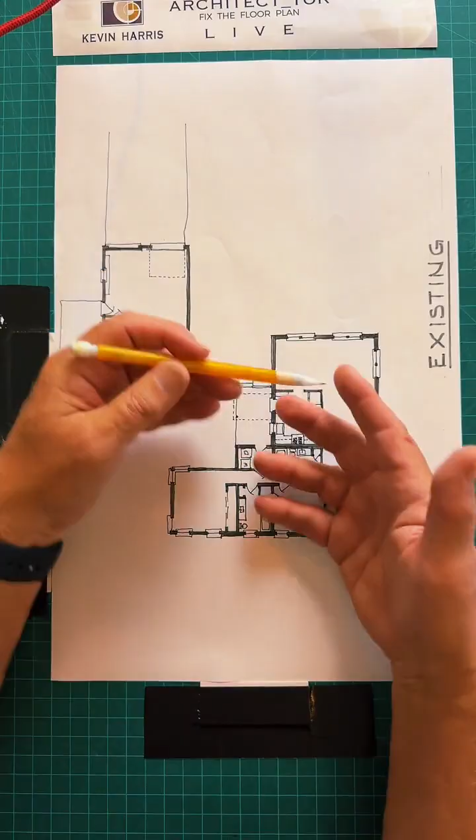Before we get started, in 5 minutes at 6, I'd like to answer any questions anyone has. I look forward to going over the floor plan and sharing with you how I took this existing floor plan, analyzed what's wrong with it, or what I think is wrong with it, and then share how I plan to fix it, and show you the floor plan as it's been fixed.

So does anyone have any questions about custom residential architecture or houses or anything? Just let me know, I'd be happy to answer.

So we've got a realtor that joined, someone who knows a lot about houses. That's wonderful. Andrew, welcome. Maddie, welcome. Kathleen O, welcome. Any questions? I'll be happy to answer them. We've got Debbie joined. Any question? Are you a realtor, Rajan?

How to read the floor map easily. Okay, well this is the floor plan. Architects always like to start with the floor plan, and then we'll go into the 3D. So it's the most common layout for a lanai.

There are all sorts of lanais. It's just a wonderful outdoor space that you're going to have, so there's lots of them. I think a lanai needs to work with the house and with your access from the house to the exterior, which is very important.

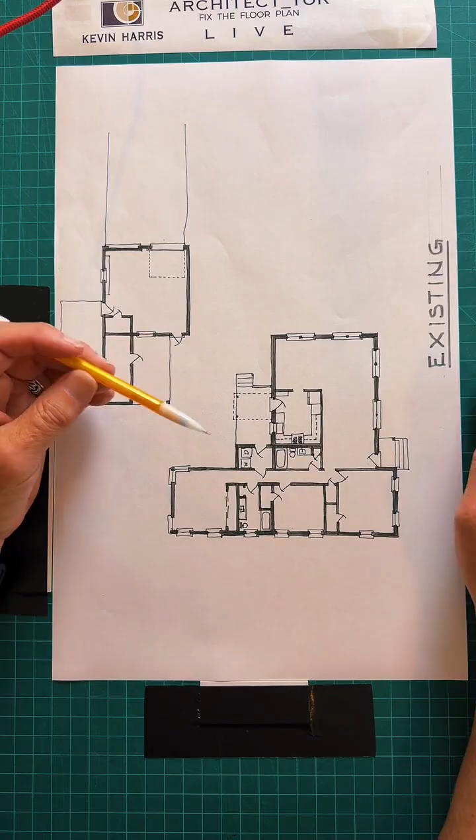No sprinklers in houses typically. Don't you think the closed kitchen is so isolated? Oh, don't get me started, I'm going to be getting into that in 2 minutes. I'm going to start with the kitchen in this house. Very good eyes, Yasin. This kitchen is a disaster. It's isolated, it's also a hallway, and there are many other problems with it. So yes, I do think it's isolated.

Thank you for the compliment from Brownsville, Texas. Wonderful. I was in Dallas and Houston yesterday, and then drove back to Baton Rouge so I could do this tonight.

All right, sprinkler systems. You're a pipe fitter, and some houses in New York have sprinkler systems. This is true, and on the really larger houses we do, I think a sprinkler system is excellent. It's typically not required, at least in Louisiana. I'm not aware that it is. But sprinkler systems are not a bad thing to have, especially if there's a fire, you need to get it at the source.

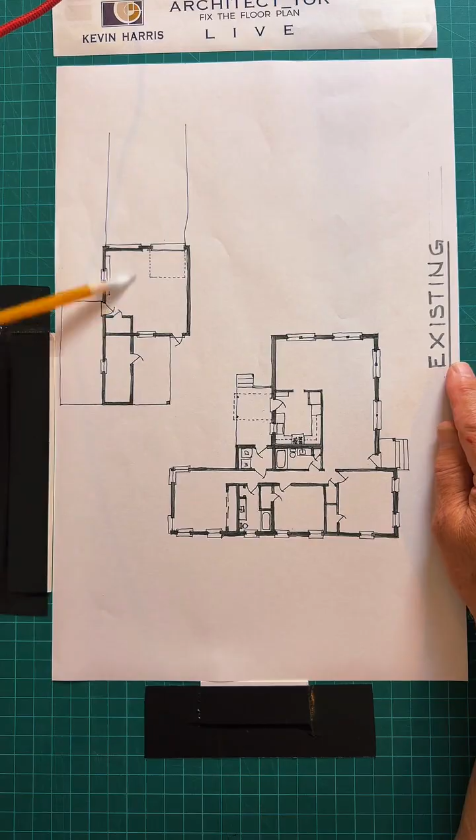Approximately 1,700 square feet. There's a garage here with a storage room added to it, and then a little concrete outdoor deck. There's a raised deck in the back with a small covered area or trellis work over it. So what's the problem with this floor plan?

Well, the first thing, which has already been pointed out, was the kitchen. So here is the kitchen, right here. What's the problem with the kitchen? One, the kitchen is isolated from everything else. It's in its own room.

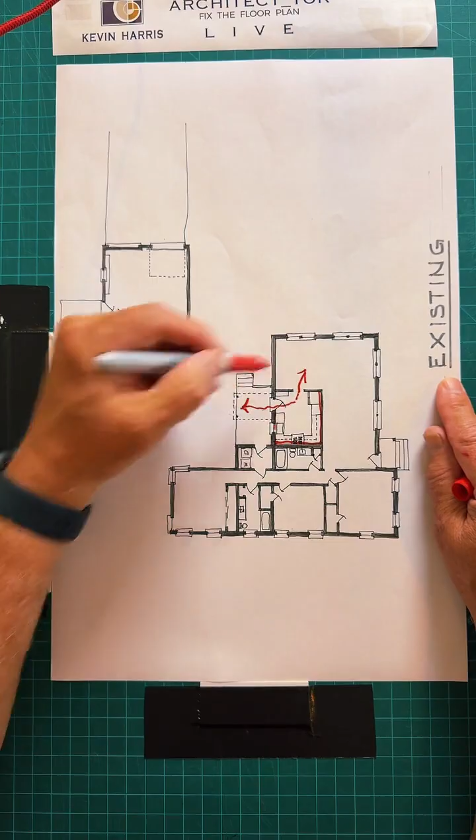Worse than that, the kitchen is made into a hallway because that's the only way to get outside from this whole living area. And the work triangle is pretty good, here's your work triangle. However, if you have any guests helping you or visiting with you in the kitchen, they can't help out because they're going to be in the way of this triangle. So there's a lot of problems with the kitchen.

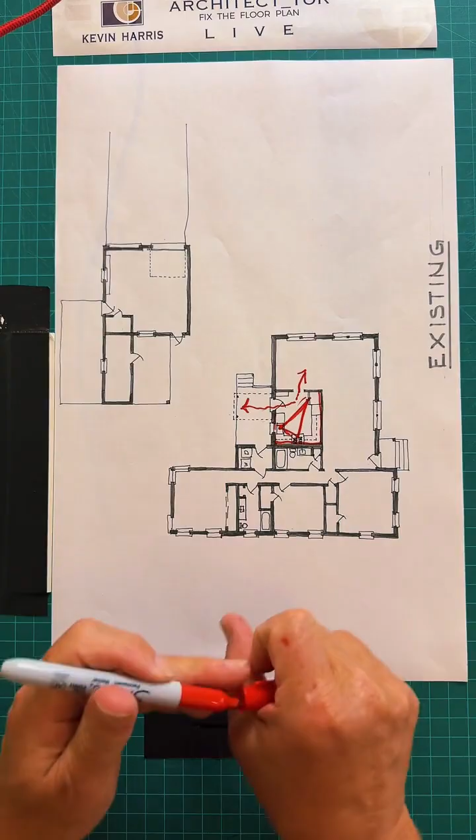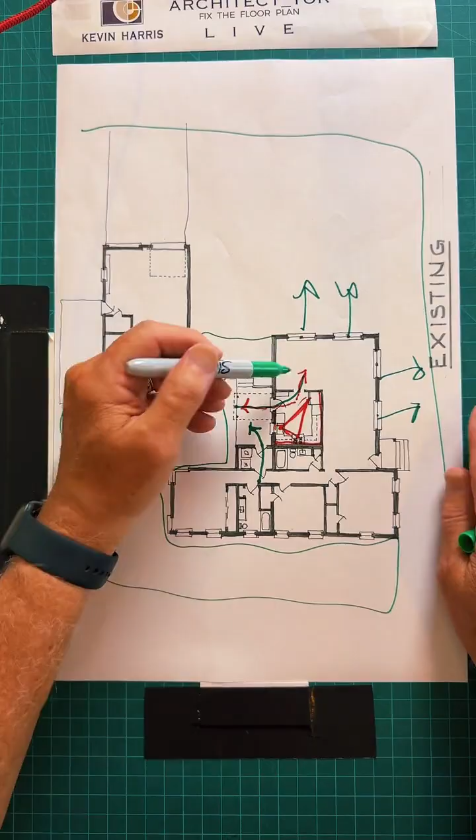The next item, yard access. Here's the yard, all over here, right? And the only way to get to that yard is through the kitchen, or worse, through the laundry room to the deck here. So the house and the living spaces all face the street. The house is on a corner, by the way. And so these windows face the street, but you can't get to the yard from this main living space, the den, living room, and dining room. So that's a problem, yard access.

The third item, the utility room, which I mentioned a little while ago, it's dysfunctional. It's wide enough for a washer and dryer, but there's 2 doors into that room. So you open the door here, and then you can stand in the utility room and just work washer and dryer, and that's it. The only folding space you have is on top of the washer and dryer. And then there's another door here that goes into the hallway right here, which is to the bedrooms. So the utility room needs serious help. It's just in the bad space.

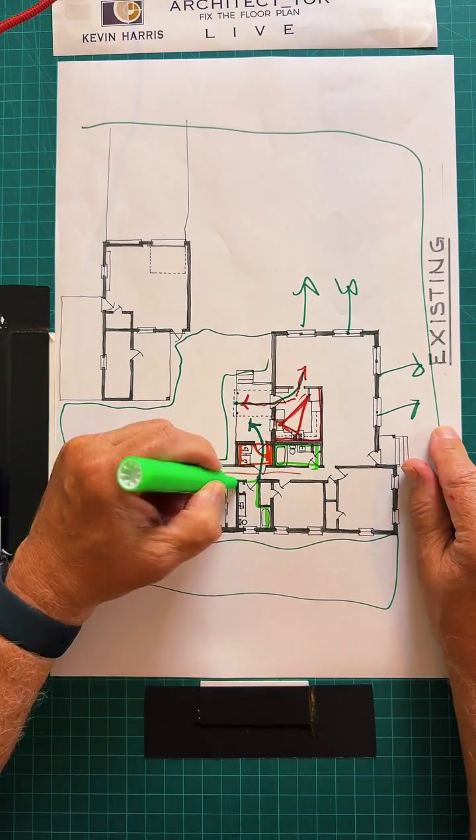The primary suite. The owners would like to have a walk-in closet and their own bathroom. Right now, the house has 2 bathrooms. However, they're both set up as guest bathrooms. Here's one, and then here's the other one. Neither one is private to the owner's suite. And so you've got bedroom 1, 2, and 3. And here's the closet for the owners. This needs to be enlarged. So the pain points here are the kitchen, the utility room, and the lack of a primary suite.

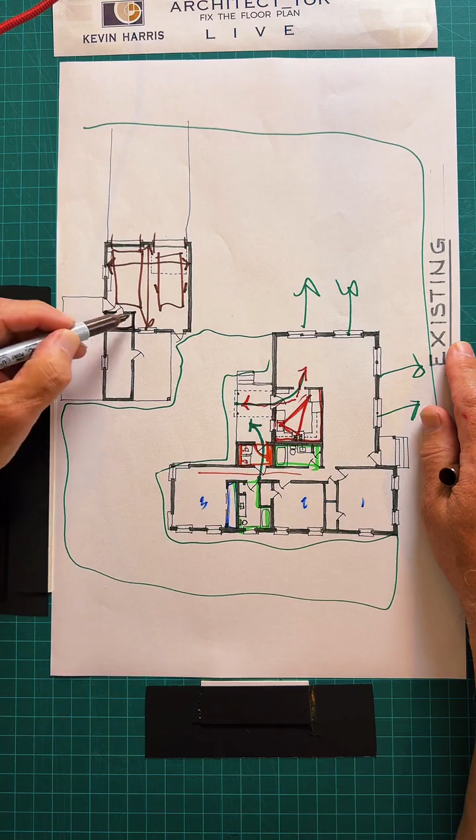The third thing wrong with this house, the garage. These garage doors are only 8 feet wide, which means the garage is just under 20 feet by 20 feet. A parking space without anything to worry about is usually 10 feet by 20 feet. But when you come in with your car, you can't open the door because there's another car next to it, if you could get 2 cars in there neatly. Another thing is the previous owners of this house took part of the garage and added this storage room inside the garage, which makes this big enough for a golf cart, but not for a car. And they wanted to have parking for 2 cars. So that's a problem.

The last issue I want to talk about is outdoor living. This is the outdoor living area. It's a raised house, so you either go through the laundry room or the kitchen, and you can get to this outdoor deck, which is only partially covered right here by a trellis. And then you look down 3 feet, and you've got your yard. So the house and the living and the outdoor covered areas, they don't connect to each other. They're all dysfunctional. They're separated, and they're all isolated.

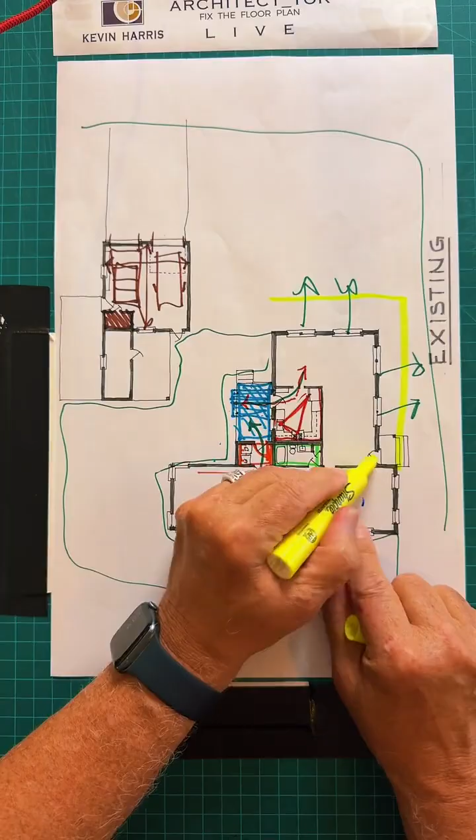There are other issues about this house that we're going to call phase 2, and I'm not going to talk about it too much tonight, but if you take this area here, the front door is in a corner. It's very awkward to come up the steps and then over to the right is the front door. There's very little presence or curb appeal with that sort of arrangement. And then furthermore, these windows have this morning sun and the afternoon sun coming around because it's east and south. And so this room gets really hot during the day, or you take all these beautiful windows and you cover them up and you can't see outside.

So not only is each room disconnected from the others, the house itself is disconnected from its site. And so I want to fix that. So how do we fix that? Let me get to that.

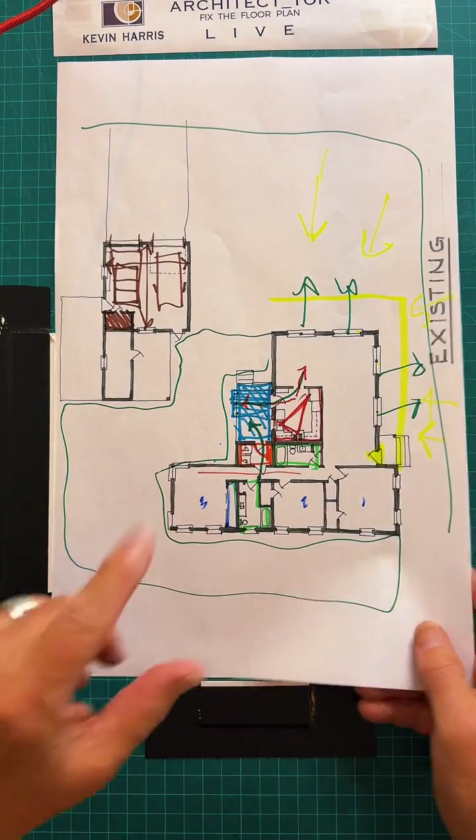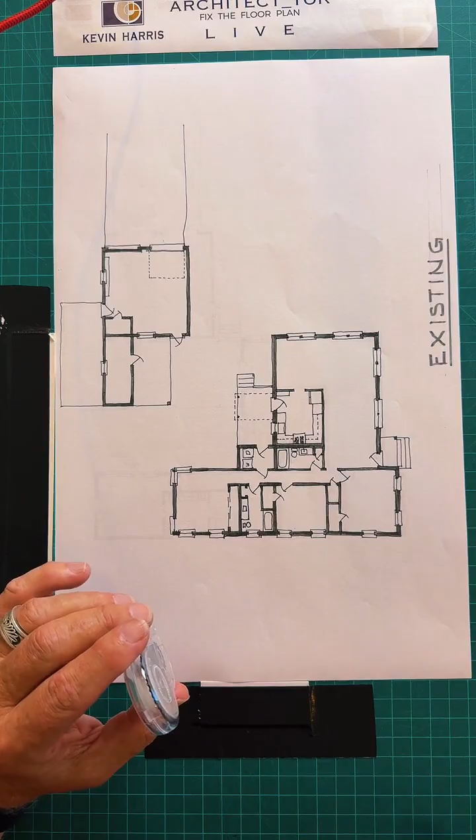So here we go, we'll take this—if you've seen me before, this is my handy dandy eraser. I'll white out and remove things. The first thing on my list was the kitchen, so I'm going to remove this existing kitchen.

With a renovation, like all others, the only way you can economically justify renovating a house, I think, is to keep as much as you can of what's already there.

Now I'm also going to remove some beams and some walls—remove some walls and put in some beams. So if I remove this wall right here, that means somewhere in the attic or ceiling I'm going to have to add some beams coming across here. I'll keep that in the back of my mind.

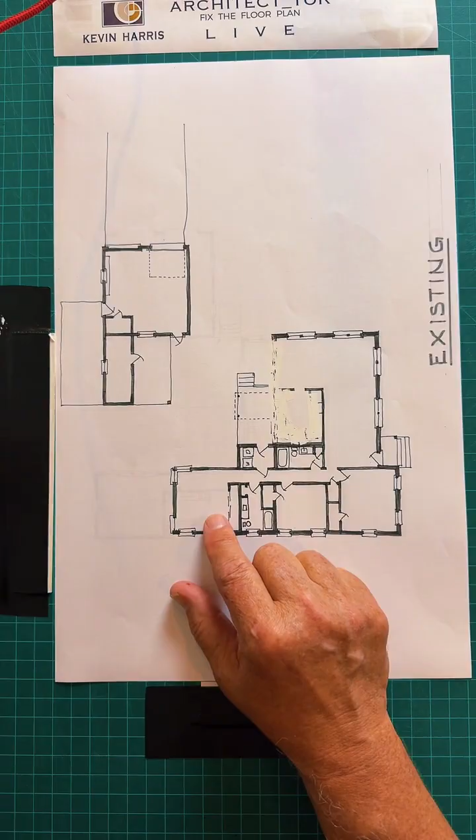Removing this wall does many things. Then I'm going to remove part of this wall right here in the kitchen. I want to take the main living room, dining room, and den, and open the den up to the backyard. So I'll extend this wall here to this wall right here, adding this space to the house for living purposes. Another complication is how you do that with the roofs—I've already figured that out, but it's a little more complicated than I can show in a real quick TikTok live. I'd be happy to show it sometime in the future if you ask me.

The laundry room—I like this access, but let's get rid of the laundry room. And get rid of this door right here, and this door right here. We're going to change the swing on this door into the hallway.

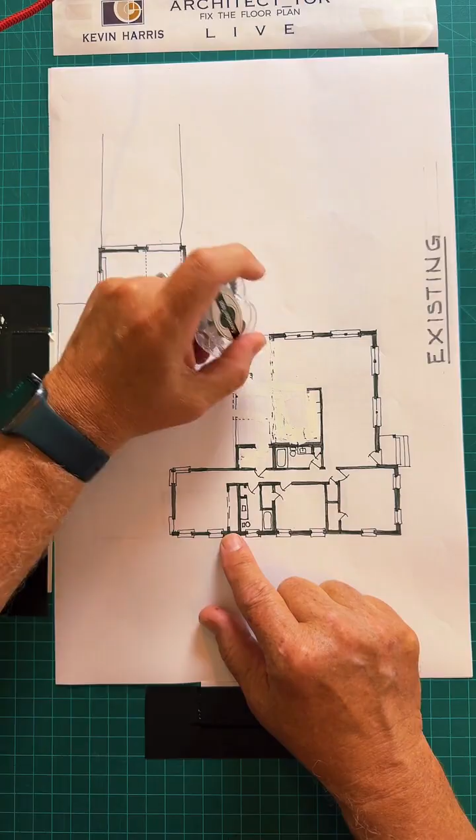Here, what the kitchen did not have was a pantry—it had a cabinet at best that you could store things in. Remember, this house is elevated up off the ground, so if I take this space here and make these cabinets, just like in the kitchen, and then put cabinets over here, this is now your pantry.

We don't need a door here—we could adjust where the door is located. Now the kitchen, I'm going to pick right here and do an L-shaped kitchen.

What I've found in all my practice is that the most efficient kitchen shape is an L shape with an island. So I'm going to make this whole thing the kitchen and put an island right here—it's a big island, 5 feet wide, with plenty of space for 3 to 4 bar stools.

Then on this wall, where you used to access the deck from the kitchen, I'm going to make base cabinets and overhead cabinets, and put the kitchen sink right here on axis with this walkway. I've given myself 4 feet between the counters, so you've got walking space for 4 feet—2 people can go back and forth and work in the kitchen without any problem.

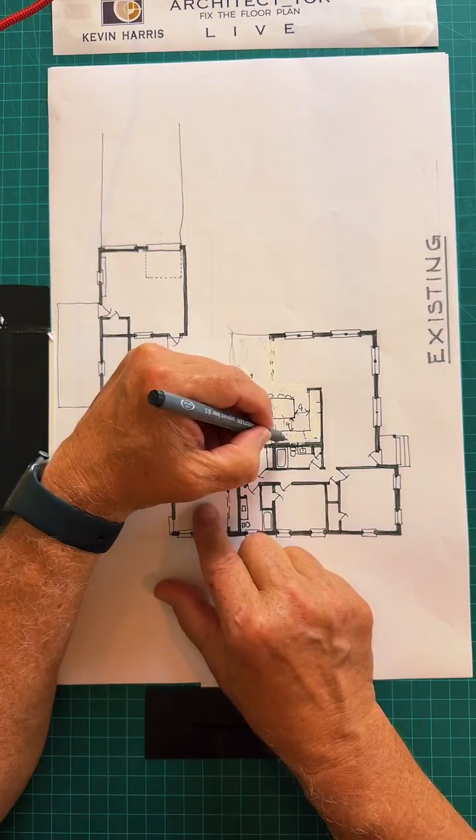Centered on the island, I've put the cooktop right here with its hood, and overhead cabinets that come all around over to here. At this point I'll have a cabinet for storing dishes and glasses, etc., and then a large freezer, and a refrigerator next to it.

So we've got all of these functions in the kitchen, with the sink over here next to a new big window lighting the kitchen. Then I'll have a beam across here because I've taken out that wall, and another beam up in the attic over here.

At this point I'm adding this addition, if you will, to what will be the breakfast area, matching one of the existing windows here and coming on around. I want to put some large glass French doors opening out to a new deck here, which I would extend over to here. So the kitchen flows—it's completely open here, without messing up all of this structure.

And then the existing guest bathroom stays as a guest bathroom.

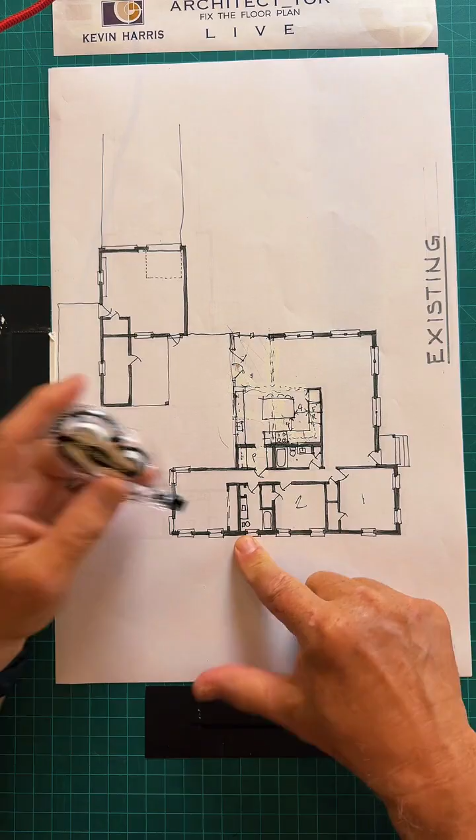This bedroom stays as a bedroom. This stays as a bedroom. However, when we get to this bathroom, the owners wanted a guest bathroom for sure, but they didn't want this bathroom and another master bath or primary bathroom.

So what I've done is we've taken this bathroom and we're going to convert it into the laundry or the utility room. And so we've got space for cabinets, for washer, dryer, and then what was the closet, it gets closed in right here.

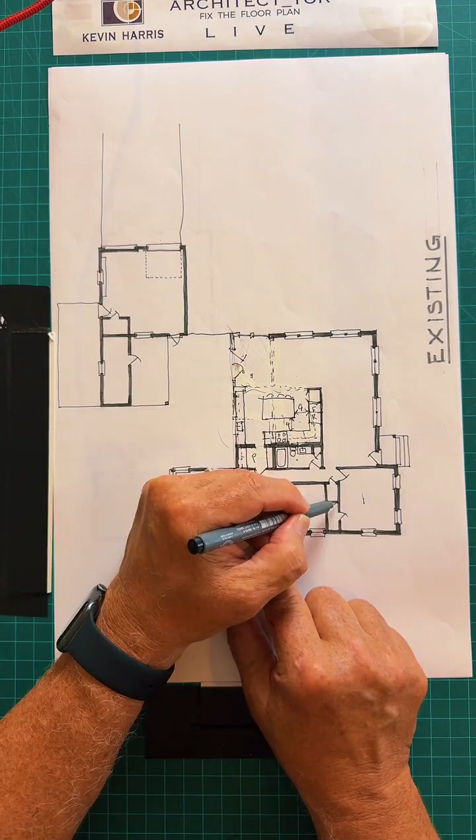This bedroom needs a closet now, but there's this long, skinny closet right here, which we're going to remove, and it has an 18-inch door, believe it or not. So we're going to take that closet, put a bigger door on it, and it's a guest closet, so that's hanging. This will be the guest closet and the guest bedroom.

So this door goes away. With very minimal alterations, we have 2 bedrooms, each with their own closets. They will both share this bathroom, which is the guest bathroom. And then we have the utility room with the washer and dryer. The dryer is near the exterior, so the exhaust can go right outside the wall here. The existing window stays where it is, and then this is cabinets and overhead hanging.

And there's plenty of room to put a utility sink in here for the laundry. Now, instead of a swinging door here, what I'm proposing to do is put in a pocket door right here. I'm a fan of pocket doors, because I don't want this door and this door to bang into each other, or when you open this door into the utility room, I want it pure function. So if the door can go out of the way, you can go straight from the kitchen through the pantry to the laundry and back without any disruptions.

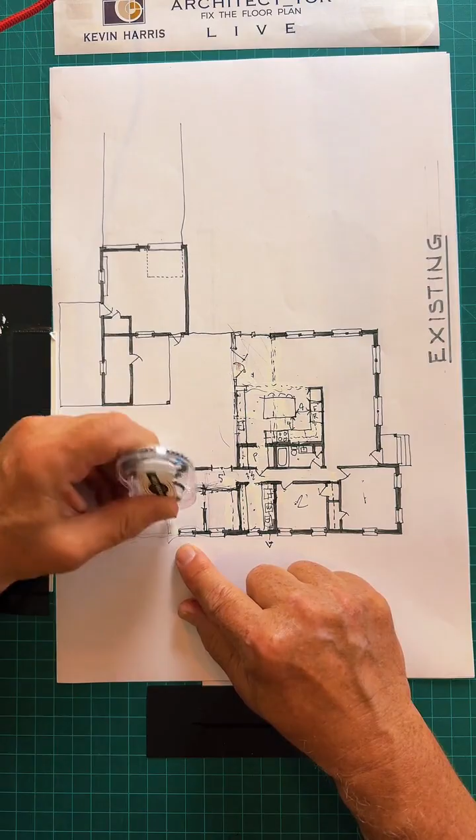Then we're going to rework. This corner will stay, but this wall comes out. And then come on down and rework right here.

So we've got, I'll put come over 3 feet or 3.5 feet with a short wall, and we'll put the potty right here. And then on this wall here, we'll put the lavatories. So we've got his and her lavatories, and then linen cabinet in between. And then in this space, we've got a 3-foot by 6-foot tub that would also be a shower. And we can have windows here, great big window. So the bathroom becomes very well lit.

And this wall connecting to the bedroom would have a pocket door in it. So, let me see.

The house is raised. You can see all the stairs in the front. It's raised 3 feet off the ground, a little over 3 feet. So that makes moving the plumbing a real simple issue.

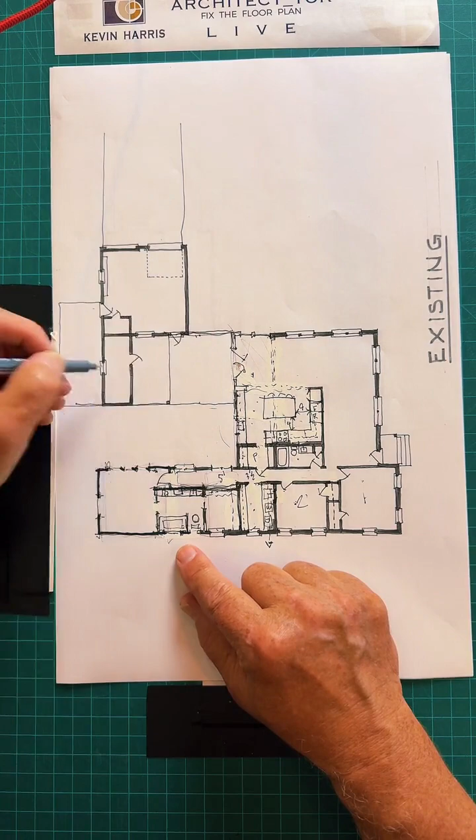And then as far as the way the roofs would work, since this is outside and I wanted the kitchen sink to have a nice view, if we took a line right here and came across, this is about 18 feet, which is plenty, but if this is a raised deck and coming across, it's plenty of outdoor space, and then we could have a courtyard right here with ample space to have landscaping, a fountain, and even access.

The two things I did not mention is this garage, other than being tiny, it's also rotting. The walls are rotting underneath it. So we're going to take the garage out, not only is it too small, it's rotting.

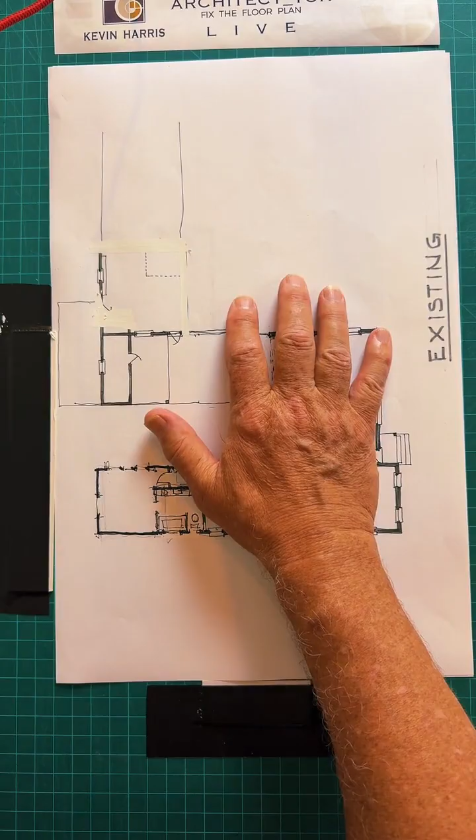But we'll reuse its foundation as best we can. Let's see, reuse the foundation for the garage and the concrete, so we don't have to completely rebuild all of that. And then this is also part of the garage. Get rid of that.

And now, since what we're doing with the deck here is to have the main floor of the house flow out at the same level all the way back to here, this area here would just come down. So the garage and this addition were done well after the house, and it was just not high quality. So we're just going to get rid of it.

That was one thing. The second thing I didn't mention is that right off this back area, there's a very, very large tree, I'll kind of draw half of it, the trunk. There's a live oak tree right here. It's just gorgeous. And that tree, of course, the shade of it is all the way across the house back here, and the owners wanted to look at this, understandably.

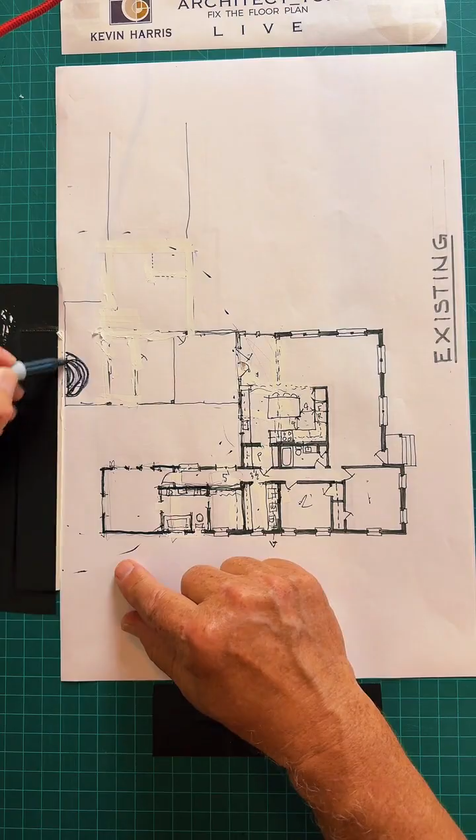And so, as close as I could, I've got this wall in the extension for the den, sort of looking at this tree and the roots. The new design would have a gabled roof here that would come out over here and stop. So this whole area, right here, would be a wood deck with a roof on it.

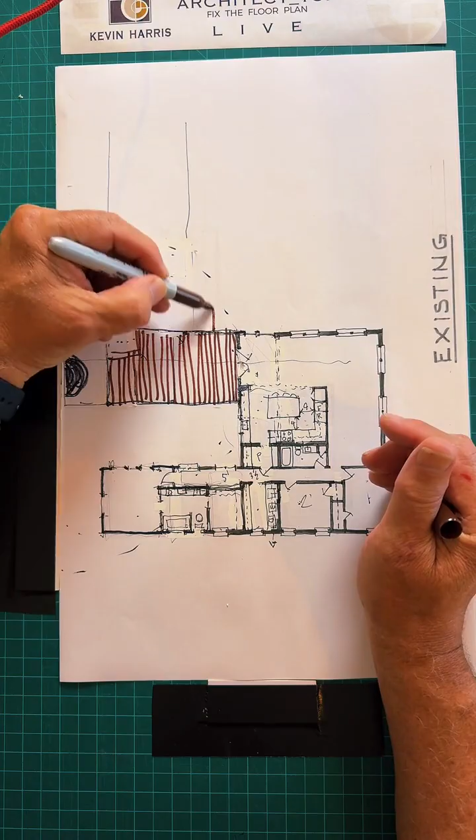Now, granted, it's 3 feet in the air, so at some point we need to have stairs that would go down and enter into the new garage. The new garage would be, instead of 20 feet wide, we'd make it 24 feet wide, and instead of 20 feet long, we'd make it 24 feet long. So this would be the footprint of the new garage.

And I would give it at least 9 foot wide doors, and then you can pull in, park 2 cars in there, and you can open the doors and get in and out on both sides. And then you've got ample space in the front for either cabinets or storage or bicycles or what have you. But garages will always have storage in them. But if you can make it so the garage doesn't become a very expensive storage and locked facility on the property, you'll actually be able to park your cars there.

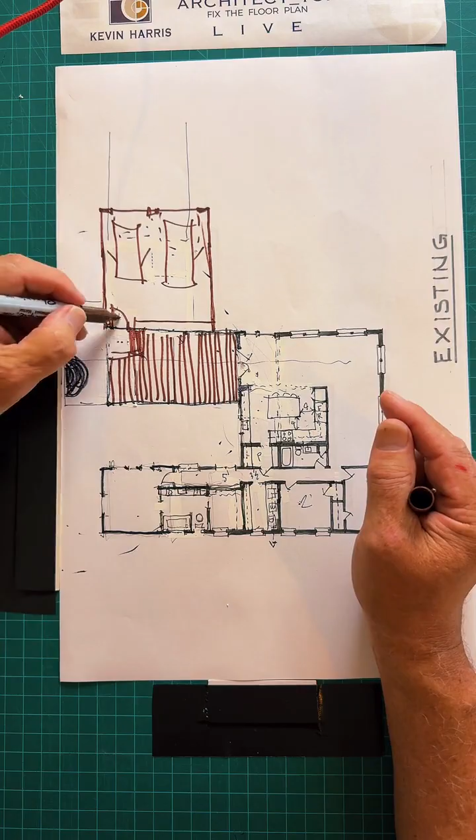So we'd have overhead garage doors here and here, and then a new door into the garage there, and stairs right here going from the deck down into the garage. And of course you'd see the patio next to the live oak tree. I'd put stairs over here for the guests to come in and come up and go right into the house if they're coming in from the back. And then this is now your grassy area here.

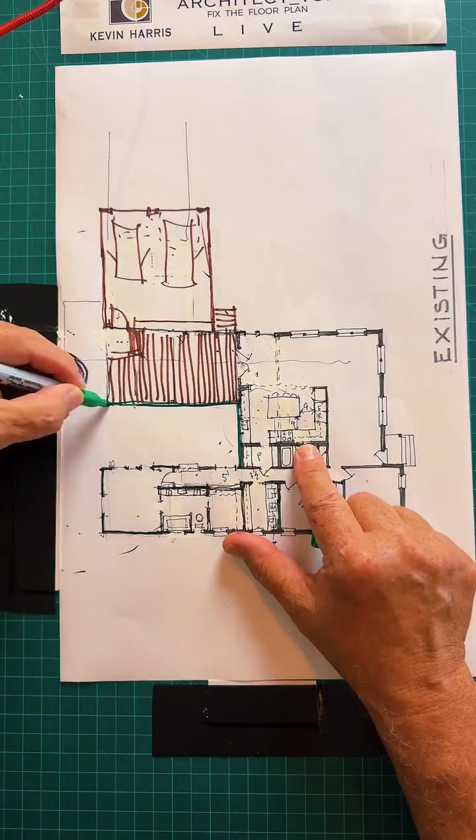As you go back, on axis with your kitchen sink and with these windows, you can have a fountain right here, which would give nice sound to the outdoor area, which is covered. Covered outdoor living spaces are important in Louisiana because it is hot. It's not uncommon for us to have a 75, 80 degree Christmas.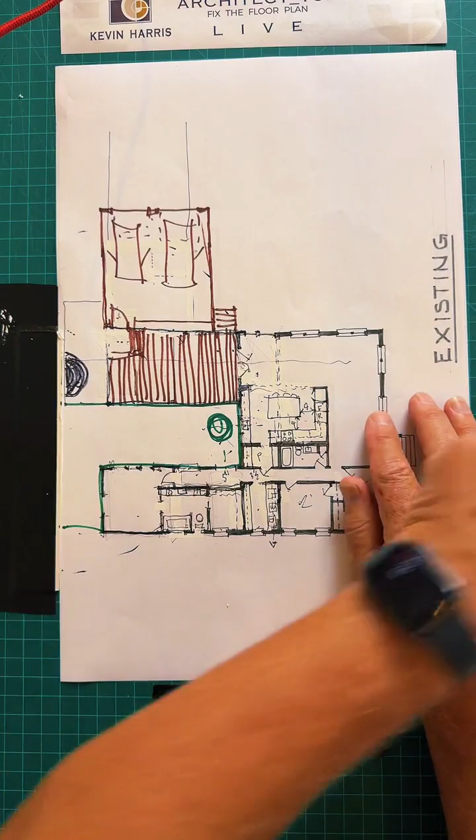Does the addition comply with the rear yard setback? Excellent question, and yes it does, because it's aligning with the garage. I've extended this a little, but the garage is not actually on the setback, so we've got a little bit more space to do that. That's a very good question, because one of the hidden parameters in any subdivision are not only your property lines, but the setbacks you have to have from a property line.

So let me see. Isn't the walk-in closet supposed to be more close? It's jumping around, let me see. In the other part, let me see. Yes, this door is not centered, so this was my suggestion.

This is the messy drawing, I wanted to show you how I got to it. But then here's that same floor plan, but all neat and without my magic wall eraser being used.

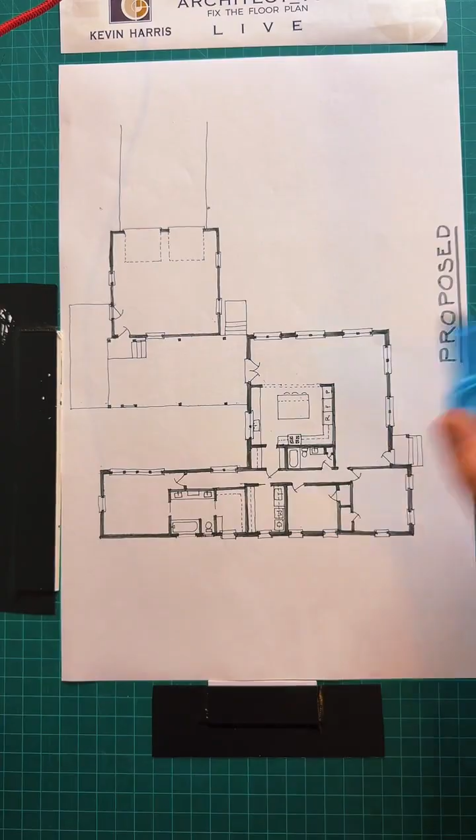So what we have here is, you come in the house, here's your living room, dining room, and den, connected with the kitchen, the very big kitchen, and it flows right outside into this raised outdoor area here. The tree is in the backyard here. The new primary bedroom has a bank of windows that overlook not only the deck, the landscaping, but then this great big tree, which is beautiful.

They have access to their bathroom from the bedroom. They put their bed on this wall with side tables and a nice bench here at the base. The walk-in closet, the laundry room, guest bedroom 1 with its closet, guest bedroom 2 with its closet, and actually one of these bedrooms is going to end up being an office for the owners.

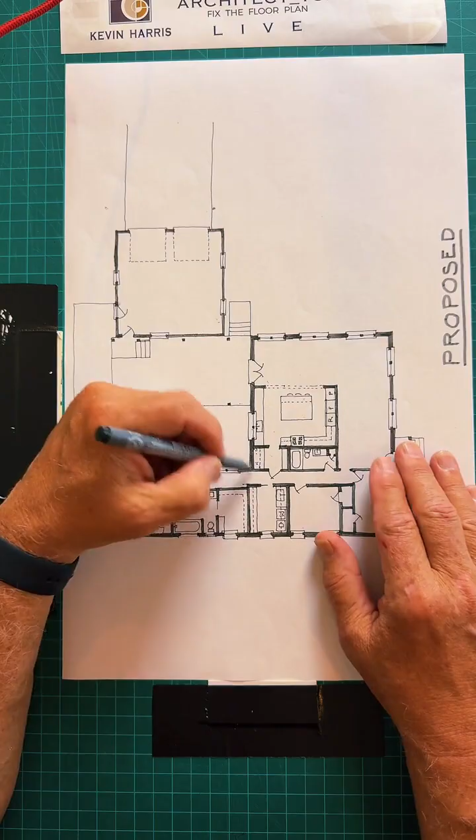So here's the pantry. In the kitchen, instead of having your blender, your toaster, your coffee maker out on the counter, those things would live in here on this counter. One of the good things we can use about the existing kitchen is we may be able to save a few dollars by repurposing some of the existing kitchen cabinets and put them here in the pantry versus just burning, slashing everything that's there, or throwing it away.

All right, so here's the door, the stairs coming up from the guest parking would be back here. They'd come up the back way, and then, or they can park in the front and then come through the front door. And so there we have it, and here's our landscaping area right here.

Any questions I can answer? Is that a bonus room on the left? This is the primary bedroom right here, this is the closet, the utility room. This is a bedroom, an existing bedroom in the house now, and this is another existing bedroom in the house. So it's still a 3-bedroom house, but it has the advantage of a walk-in closet for the primary suite, 2 lavatories and a 3x6 tub shower in the bathroom for the primary suite.

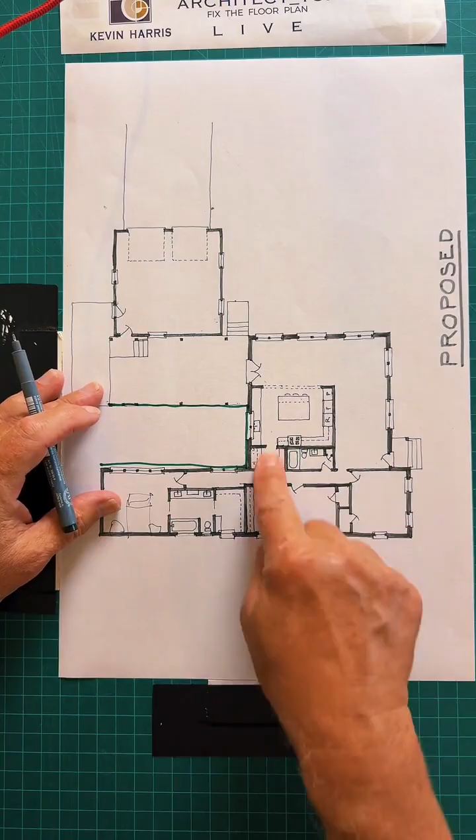It's got a butler's pantry, which is also a shortcut from the owner's primary suite to the kitchen. They can cut right through the butler's pantry to go into the kitchen versus having to walk all the way around to get into the kitchen, which is a circulation issue. And then this door would be fitted so it can open flat against the wall, so when they're having a party, people can actually walk all the way around if they want, or go outside and come back in.

One of the things for phase 2 on this house would be to take this bathroom—it had already been redone by the owners, and I didn't want to throw away the nice finishes they'd put in there. I would, however, make the 2-foot 6-inch wide door a 3-foot wide door.

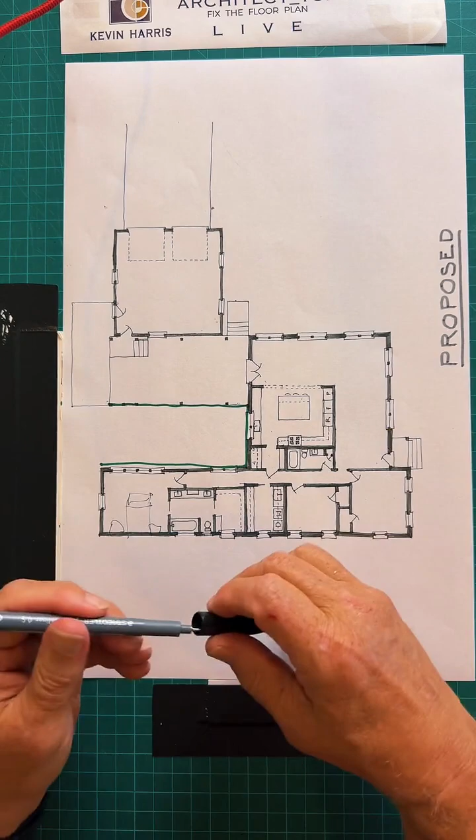I do the same thing for the bedrooms. So the greenhouse roof, so it's see-through—that's a great suggestion for the roof for this covered outdoor area. If you made it a Lexan roof or a greenhouse roof, you'd be able to see the branches and the trees through it.

That's great. That's a lovely idea. I was going to change the front door area. Well, the front door area—my recommendation to give it curb appeal is to extend the roof out across here.

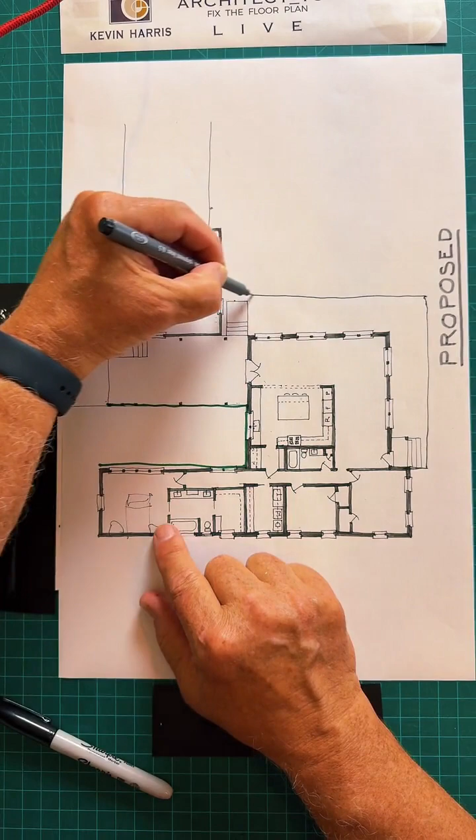And then have a series of columns that would work its way around. For me, one of the important things about a renovation is, as an architect, if I do a really good job, it doesn't look like I was there. It looks like the renovation came with the original house, and that's an important feature you should keep in mind whenever designing a renovation.

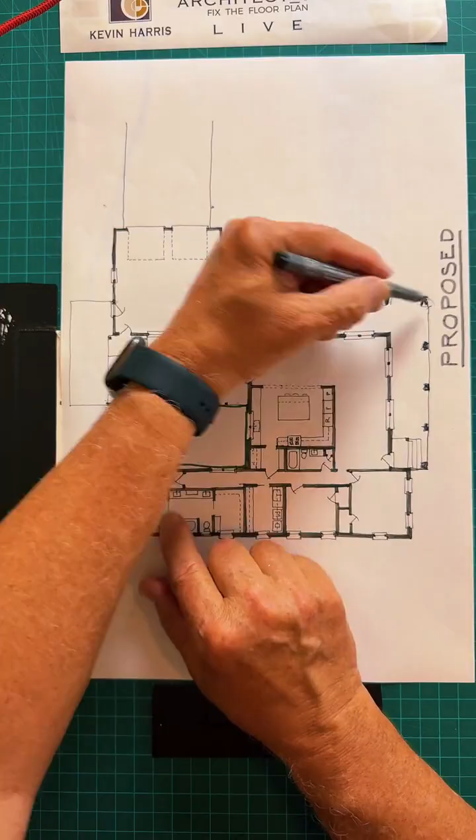I'd mentioned that these windows here get the morning sun, and the afternoon or all-day sun just heated up this part of the house. If we shade that with an 8 to 10 foot deep porch, we can have, for the cost of a porch and a roof—

Let me see here. Here we go. Move these steps out and then change that front door.

So our front door could be these beautiful French doors here. The steps could be anywhere along here—frequently the steps will be sort of centered with the facade.

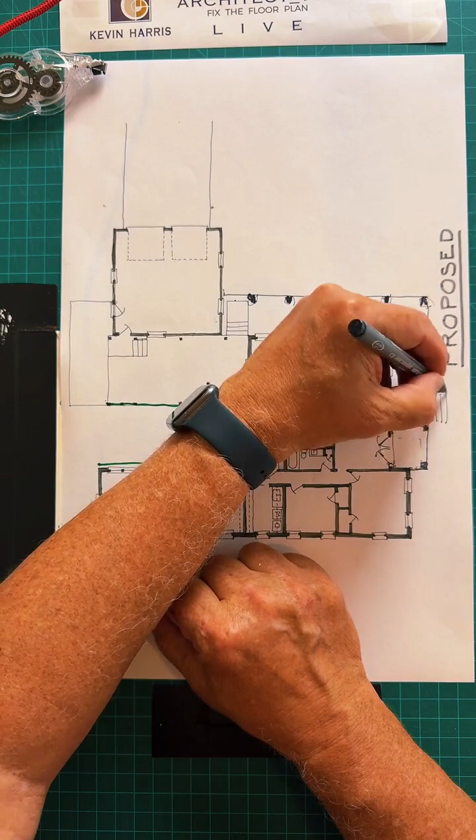I put 5 columns there. I'd probably put 6 in reality, so that we could center the steps on the facade. And then you come into the front doors.

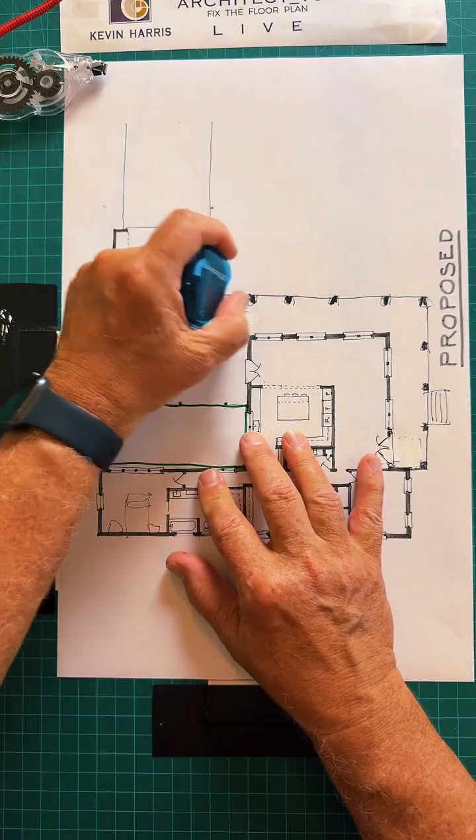This area would be a porch, and if it is a porch, then these steps would be covered over or moved, and we put steps right here. So if guests come, parking their cars here, they can come up this way, come in here, or circle all the way around.

And so you get a wonderful ability to have outdoor living, entertainment, all through here, and with the kitchen being connected to all of this.

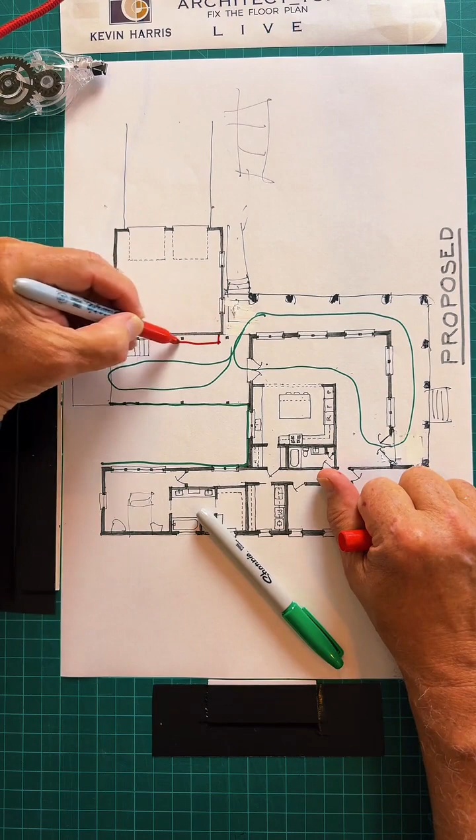Another aspect of this would be to take the outdoor kitchen and put it, say, along this wall here. It's close and accessible to the kitchen, but it's also wonderful with this raised deck area on the outside.

So would the deck be covered? Yes, the whole deck would be covered. Let me show you—this would be all covered right here, okay?

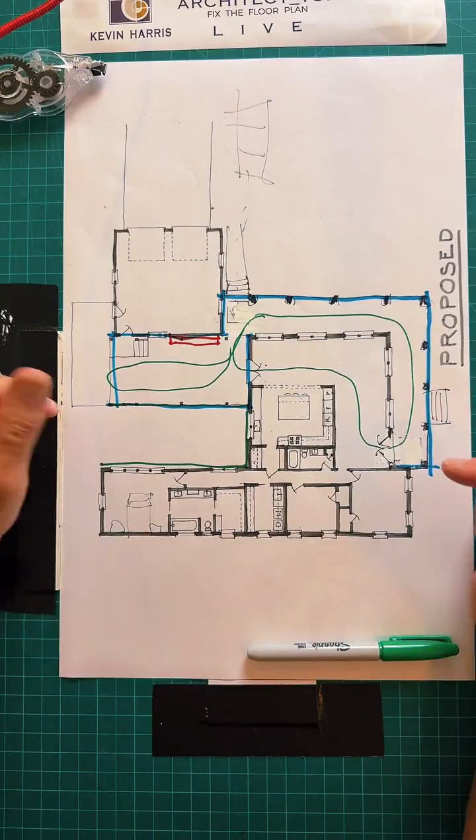Very good question—have I developed the elevations? I have, I've got it in 3D actually. This is for communication purposes, quickness, and to explain. I show my clients the freehand drawings, then I jump on my computer and do them on the computer in 3D.

The garage view from the room—it's essentially a wall here, and it's got windows on the sides.

So let me see, walk-in shower or shower tub combo—that's an option. It could be a giant shower, or it could be a tub with a shower in it.

And the windows—we talked earlier about different ways. I've had success with windows in a shower. You could either have vinyl windows, since the water in the shower is not going to rot your window, or you could have a splash shield in front of the window on a hinge, like a shower door, that would protect the window from the shower.

The heat situation in the living room—yes, this covered deck would protect all of that. And that was going to be a phase 2 improvement to the house.

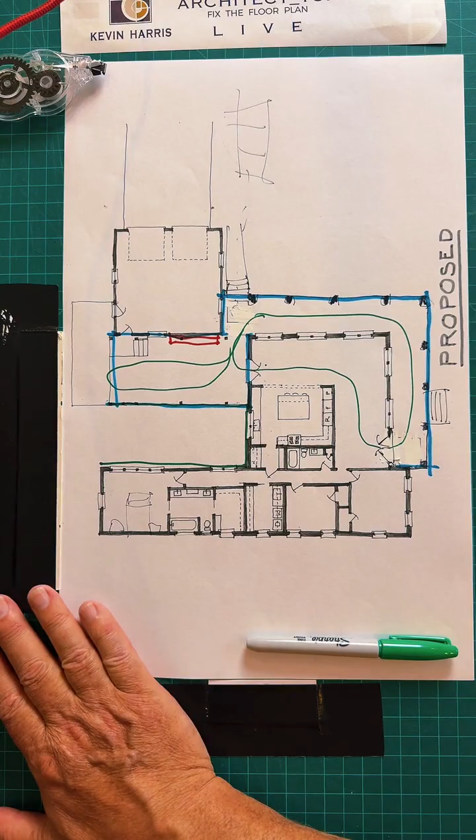So let me see—flip the primary closet and the bath. I don't see the advantage of it unless you'd have to go through the closet to get to the bathroom. Typically it's the reverse that's preferred, but if that's how you'd prefer it, that certainly could be done.

How many square feet have I added? Like here and here, I think probably about 600 square feet, plus another 600 covered.

And a ramp? Yes, you can do a ramp as well. On this house, you could do a ramp that doesn't look like a ramp, or it's hidden—it could even be on the back side of the garage where it comes up and doesn't advertise that, oh, there's a ramp, somebody needs a ramp that lives in this house.

Move the wall in the kitchen—the wall was removed here. This is a furniture wall; this is actually where a TV is, would go on that wall.

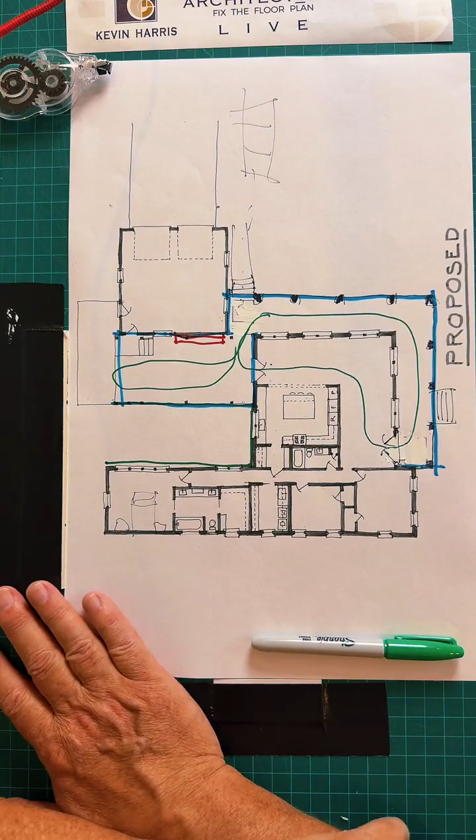Yes, there are sliding doors in the primary bathroom and closet areas. I'm a big fan of pocket doors.

So there's a dead zone between the bedroom and the garage. No, this area here is a landscaped area. We haven't decided exactly where, but somewhere along here, depending on the landscape architect's plan, I was hoping we'd have a fountain. We might have steps coming down, but this is very much a garden area to enjoy and view. It'd be very pleasant.

Explain how budget constraints played into my decisions. Well, they're my recommendations, and yes, there are budget constraints. One is phasing it, and two, how much can you actually do within a certain budget? The owners bought the house, and it depends on how expensive her house is in the neighborhood. Is the neighborhood being revived, or is it in decay? So a lot of things factor into how much you can or should spend on a house.

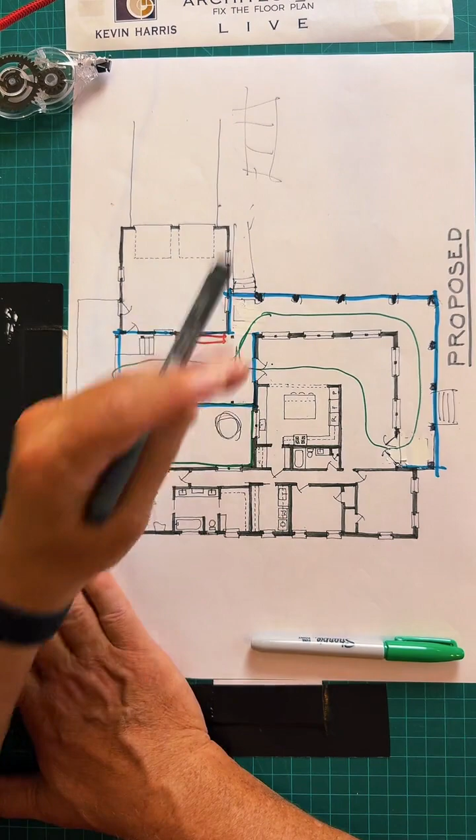So for CAD, yes, I use ArchiCAD. With this house, I learned from a TikTok friend in New Jersey who did a series showing how he uses LiDAR scans to get the 3D of a house, sends it to a company called Canvas.io, and it comes back in his CAD program in 3D. Normally this house would take me and my staff a week to measure everything, locate the doors, windows, electrical outlets, air conditioning, and surmise the structure. Instead, we go there, take about an hour to do the LiDAR scan, send it off, and it comes back in 3D. Then we do a little cleanup and verify it's correct. Then I have a 3D model on my computer, and I take my initial comments and discussions with the owner, jump on the computer, and the next time I meet with them, I show them in 3D not only their existing house but how it might look if we solve the plan. Now, I've shown you how I've solved the plan.

I haven't shown you how I solved the roof. The roof is a huge issue, which I was able to solve here. When it's all said and done, the house to me has got to look like I was never there, just a beautiful house to start with.

The outdoor living space, the outdoor kitchen, is here. This is a covered outdoor area. Phase 2 would be a covered deck that went all the way to these areas. It would not only shade the house and these windows, but also allow circulation during entertaining.

The existing HVAC is not able to handle the current load, much less the additional load, so no, it needs to be replaced and upsized.

How long should this take to complete? I would say 6 to 9 months would be ample for the construction. And of course, preparing the drawings is going to take another month or two, depending on how fast we can make selections with the owners.

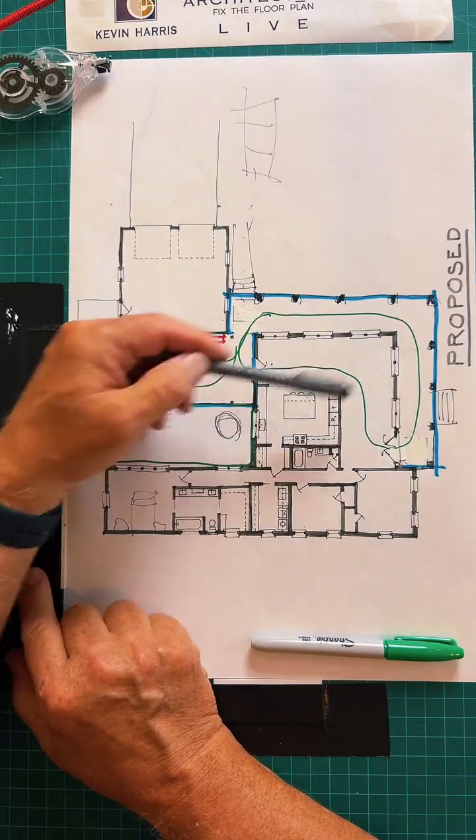Put the TV down by one of the windows to the far end and create an open breakfast bar. Let me see. Yeah, we could axe a window and put a TV there, but it depends on how important the TV is to your living concepts. No, it can go in many places.

All righty, so more questions. Constance, I would love to do your house. I'm licensed, and because I'm an architect, I can only practice in states where I'm licensed. I've decided to limit my licensure to the states that butt up to the Gulf of Mexico. We have similar problems with hurricanes, humidity, and insects that will eat your house. If you sit outside in a wooden chair, termites swarming may eat the chair out from under you, but it's not quite that bad. The solutions are similar in all these states: Texas, Louisiana, Mississippi, Alabama, and Florida. You're in Arkansas, not far away. I've got good architect friends in Arkansas that could help you, Constance.

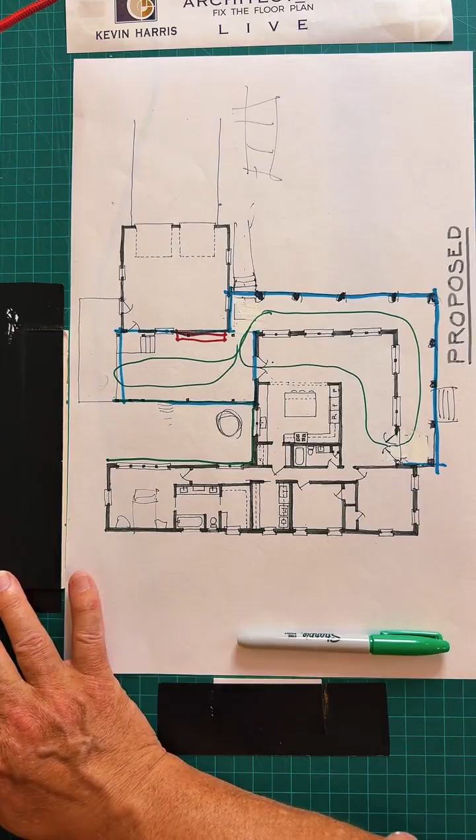Not a fan of closets in the bathroom? Explain the ventilation. As far as your disdain for closets in the bathroom, I understand that. We've got a report coming out based on the 19th that shows this is a big issue for a lot of people—some prefer two doors from the bedroom, one into the bathroom and one into the closet, keeping them separate. Others love it combined. For you, I'd come up with a different floor plan where the entrance to the closet was separate from the entrance to the bathroom. There's different ways to do that, but the most efficient way, which I would have done here except I wanted the view of the tree so I wanted the bedroom at the end, is to not have this hallway. Put the door to the bedroom right here, then the bedroom, then access to the closet or bathroom in the back. You'd gain that square footage, or not have to build it at all, with the same functions. But each project, each client, and each site is different, and on this site there's a live oak tree I wanted to make sure we had a good view of.

All right, composite decking, absolutely. I can't tell you how many clients have called me 8 to 10 years after building their house with pressure-treated wood decking, having to replace it. Composite decking is the way to go. It costs more the first time, but it will be there for the duration.

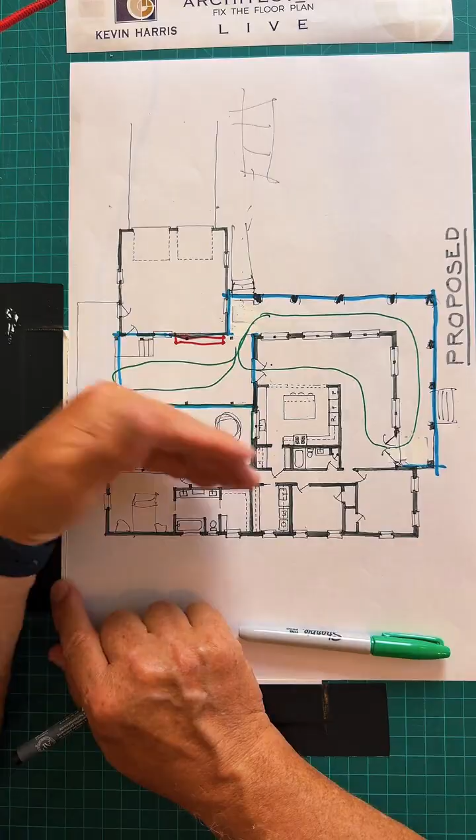What's the best resource to find an architect in Connecticut? Oh, there are a lot of good architects in Connecticut. What I'd recommend is calling your AIA or going to the AIA chapter website and looking for CRAN members—C-R-A-N, which stands for Custom Residential Architects Network. It's a specialty group of architects who just do custom residential work, and they belong to that knowledge community the AIA calls CRAN. So call the AIA office and ask for a list of architects who are CRAN members, or Google CRAN and you can do the same thing.

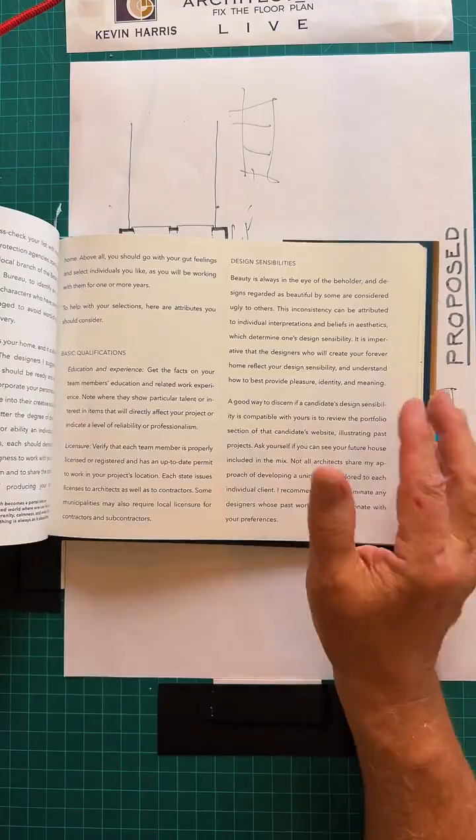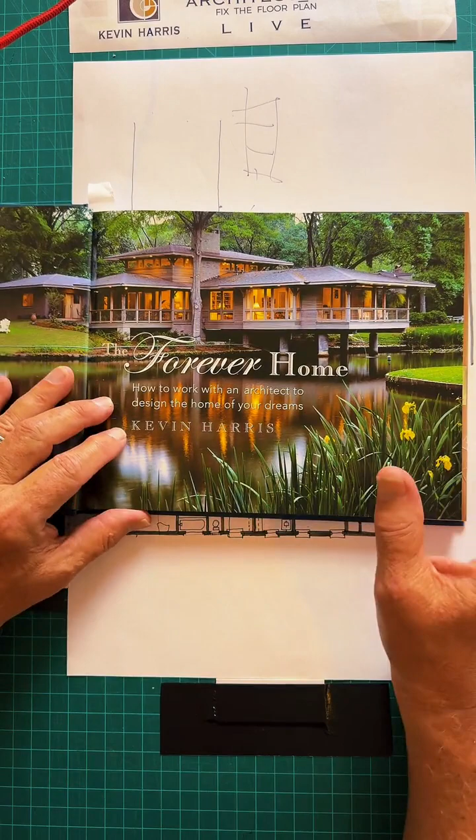But what this book is, it's advice that I've given homeowners for 43 years. And it is essentially how to work with an architect to get the home of your dreams. The first chapter is, what is a forever home? How do you work with your architect? And chapter 1, do you even need an architect?

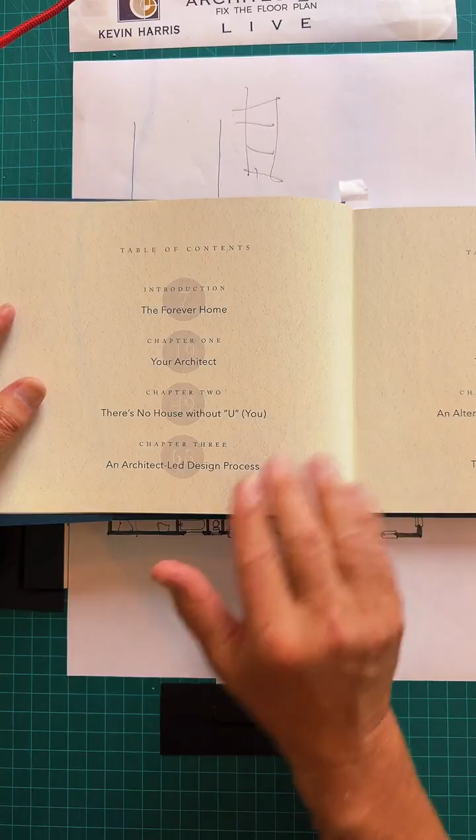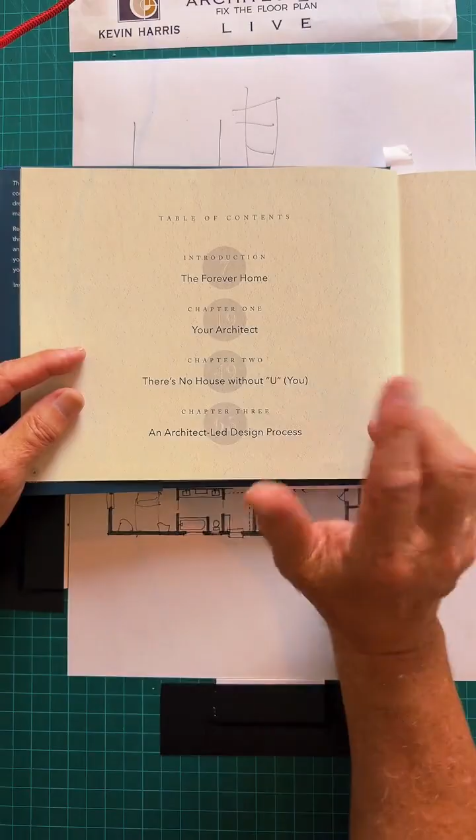Well, the answer is no. But at a certain point, you'd be well advised to have an architect. If you have an existing home and want to renovate it and fix the floor plan, my recommendation is to at least get an architect, locate one that will do what I call a design consult. They'll literally fix your floor plan and concept. Then you can go to a builder and or a drafting service and have them draw it up, and actually save on fees that way. If it's a bigger renovation, then not only should you have the design consult, but I'd recommend using an architect to do everything.

The book has 7 chapters, and it's all about the process. It's a roadmap, if you will, on what to expect when you engage in a renovation project or new construction for your house. And then the last chapter, chapter 7, is the 4-letter word: cost.

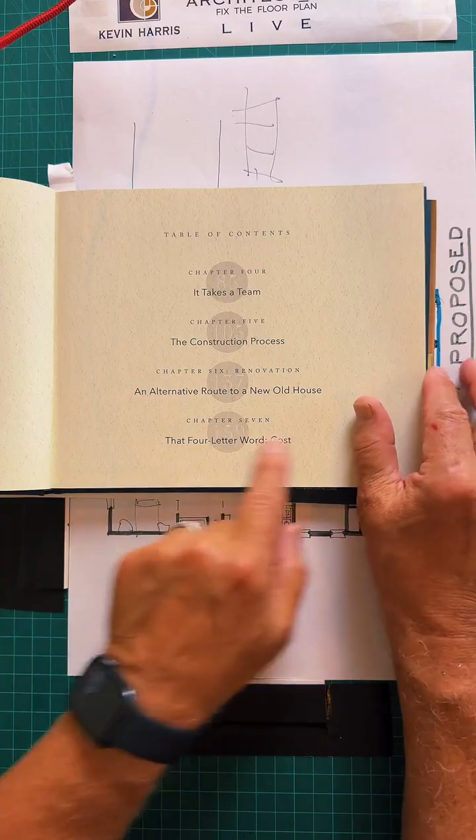And that has come up already with several of the questions I can see here. How much is this going to cost? What is the budget? Blah, blah, blah. This chapter is all about anecdotes of ways clients over my 43 years have tried to save money. Sometimes it works, and sometimes it backfires. So I just want to let you know some of the clever ways people have tried. Everybody wants to conserve their resources, and I understand that. But understand there are some caveats that come with that.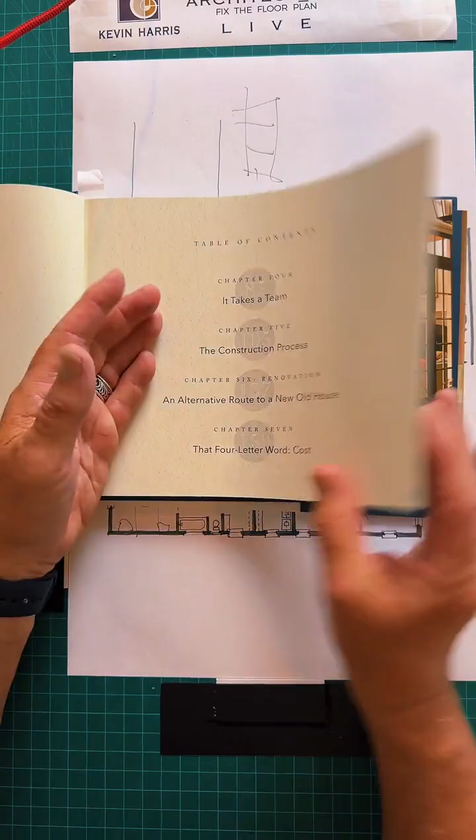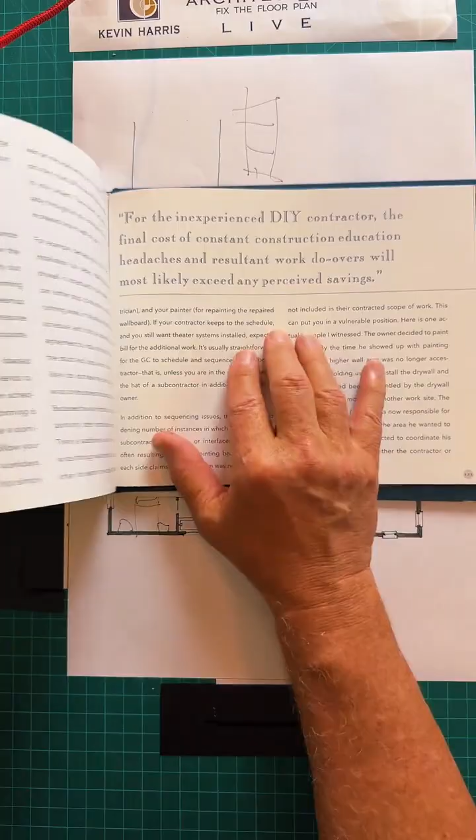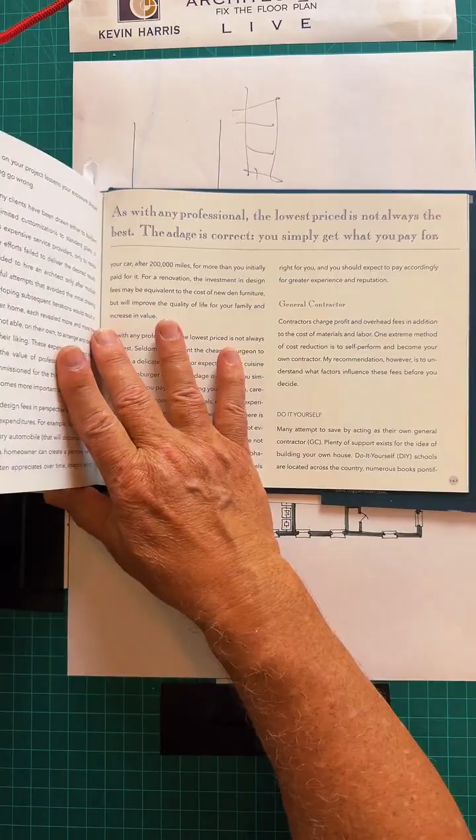I don't discourage it. A lot of people want to do it themselves. That's great. But understand that if you're going to do it yourself, by the time you learn how to do it—if you haven't done it before—it's too late. You've already expended the time and money. If you had to do it a second time, you'd be better at it, but you don't have that. If you're only going to pay once, you need to get it right the first time. So when you work with a professional, you get what you pay for.

This book is not about the pictures of my work. It is about the process you'll go through in construction, and it's sage advice I've given my clients throughout my career, and I recommend it. You can get it on Amazon.

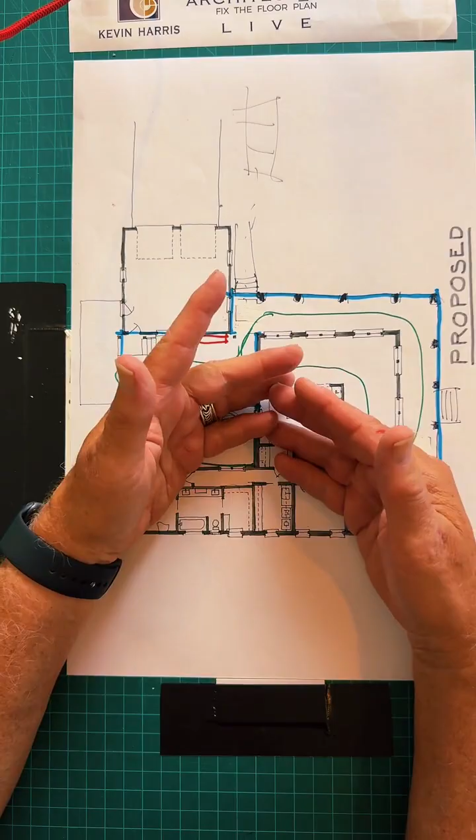So, any other questions? Could an interior designer give legitimate ideas on a floor plan? Absolutely. In the 10 years I taught at LSU, the last few years I insisted on teaching collaborative studios where architects and interior designers were teamed up on the same project, and it was wonderful. Interior designers really understand how—they're taught with far more rigor than, say, a decorator. And it's not to slam decorators, but decorators aren't licensed in states where interior designers are.

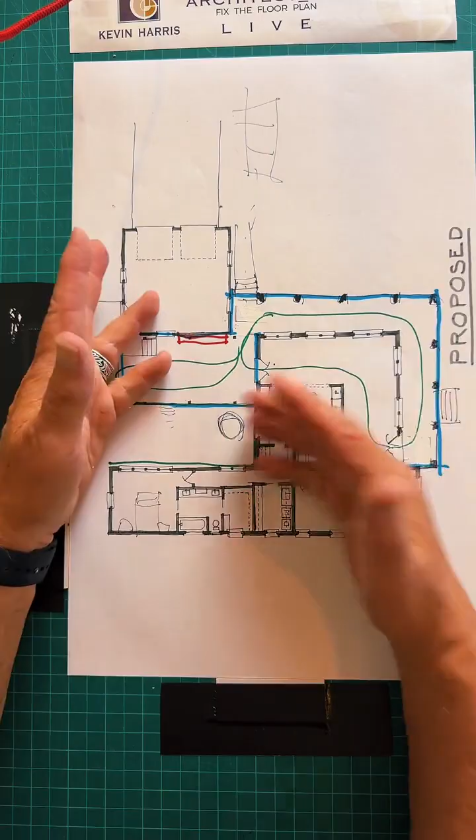Yes, they can give great ideas. The process I go through with all my clients is if they have an interior designer, I want to talk to them early in the process. I will show them the schematic design and ask them to comment on it. They can see it in 3D, just like I show the owner, as well as in plan. Then I ask them for their input—if there are too many windows, or about the artwork, the furniture they have.

Frequently, I'm working with an interior designer right now who had a piece of furniture specific for the house that was 54 3/4 inches wide, and it needed to go in the foyer. So I needed to figure out how to put that in the foyer and make it work without looking forced. And of course, we came up with a solution that solved that. There were many other items where the interior designer had wonderful suggestions to the plan.

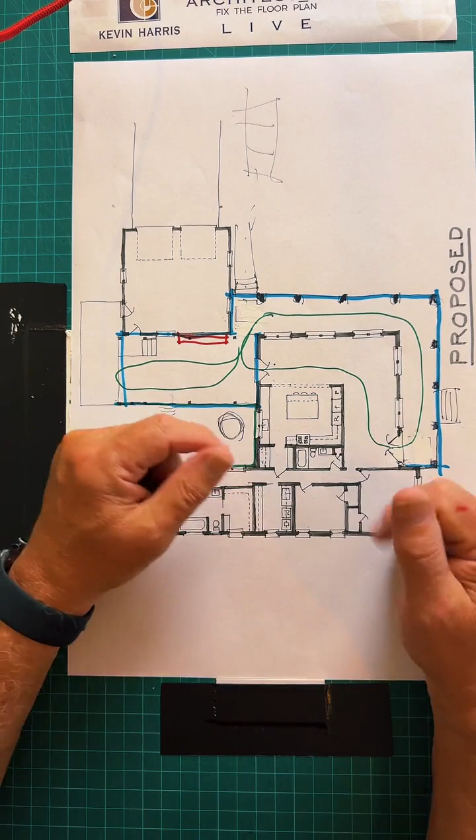I don't agree with all of them, but we work it out with the owner and come up with a collaborative solution that is far better than if it was left up just to me or just to the interior designer. So, anything else?